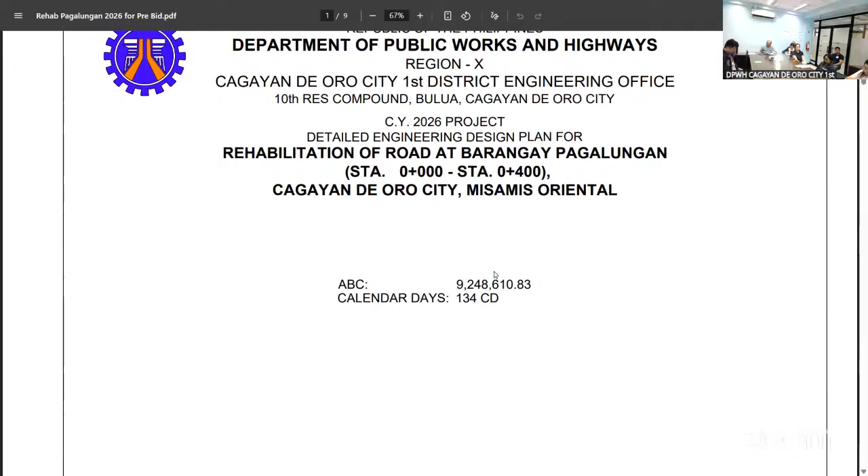Good afternoon. For rehabilitation of road at Barangay Pagalungan, Cagayan de Oro City, with an ABC as mentioned and 134 calendar days. Here is the map or the site development plan for the rehabilitation of road at Barangay Pagalungan, along with site pictures for the beginning and end. The scope of this project is mainly the rehabilitation of the existing road.

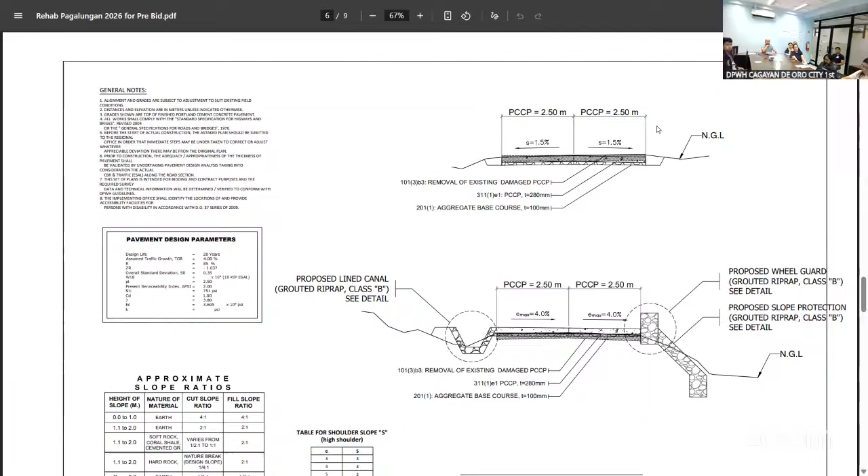Before showing the MER and summary of quantities, I'll show the typical roadway sections for the project. The rehabilitation of the existing road is to replace it at 2.5 meters per lane, with a PCCP thickness of 280 mm and an aggregate base course of 100 mm as shown. There is also a proposed lined canal for the project and slope protection as shown here.

And here's also the typical roadway section with a cross drain and catch basin, waterway, head wall, and there are the slope protection, grouted riprap details, the wheel guard details, and the lined canal details. For the head wall and the cross drainage system details, and a typical reblocking detail for rehabilitation of road.

So back to summary of quantities or the scope of works. We have permits and clearances, B.3, 1 lump sum for excavation permits, B.5, project billboards and signboard 4 each, B.7(2), occupational safety and health program, 1 lump sum, B.8(2), traffic management, 1 lump sum, B.9, mobilization plus demobilization, 1 lump sum.

For earthworks, we have 101(3)b3, removal of actual structures plus obstruction of 0.23 meters thick, PCCP unreinforced with a quantity of 2,000 square meters. 102(2), surplus common excavation with a quantity of 780.38 cubic meters. 103(1)a, for structure excavation common soil with a quantity of 563.43 cubic meters. And 104(1)a, for embankment from roadway plus structure excavation common soil with a quantity of 55.56 cubic meters.

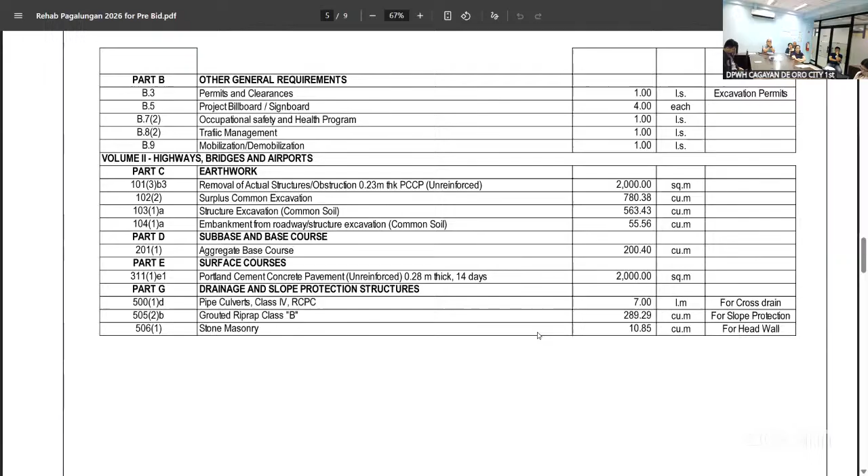And back to our MER, we have two-way radio, 3 units, subject for bid bulletin. So barricade flasher light, 10 units, trailer for equipment, 1 unit, trailer for minor tools, 1 unit. Backhoe with pavement breaker, 1 unit, payloader, 1 unit, dump truck, 2 units, concrete saw, 1 unit, bulldozer, 1 unit,

backhoe, 1 unit, motorized road grader, 1 unit, vibratory roller, 1 unit, water truck / pump, 1 unit, concrete vibrator, 2 units, concrete screeder, 1 unit, concrete saw, 1 unit, bar cutter, 1 unit, mechanized joint sealer, 1 unit, and material testing apparatus, 1 set. That's all for rehabilitation of road at Barangay Pagalungan. Any questions?

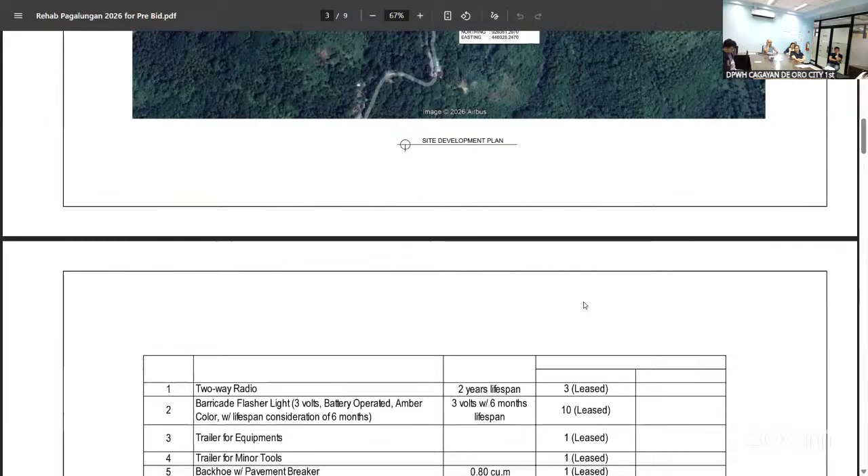So do we have any questions? How about from our online? There's nothing. Understood? So there's a bid bulletin for the minimum equipment requirements. So there's no questions regarding the details of this project.

So now let's proceed with the second project. Asset preservation, rehabilitation, reconstruction, upgrading of damaged roads, secondary roads, Cagayan de Oro City, coastal bypass road, S01248MN, Chainage 654 to Chainage 1123, Chainage 4,000 to Chainage 4150, Cagayan de Oro City. The details of this project will be discussed by Engineer Albert Marcel. So you can now proceed, Engineer Albert.

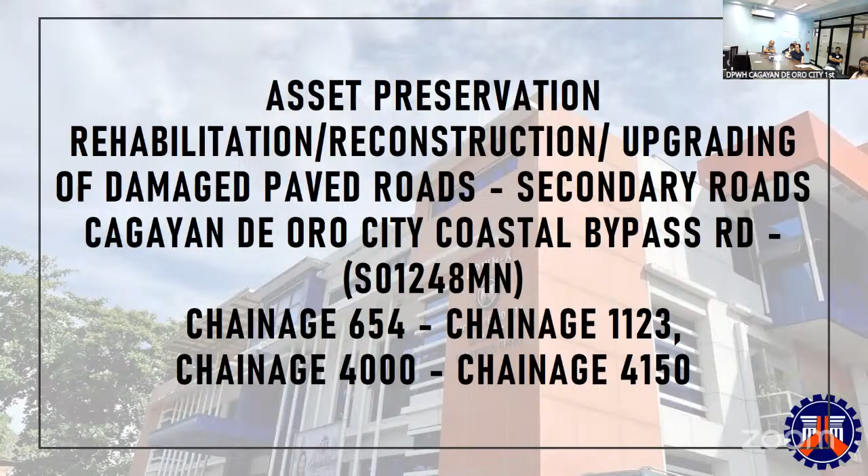Hello. Good afternoon, everyone. I will present 26KH0068, the asset preservation, rehabilitation, reconstruction, upgrading of damaged paved roads, secondary roads, Cagayan de Oro City, coastal bypass road, with a chainage of 654 to chainage 1,123, and chainage 4,000 to chainage 4,150. With the ABC of 18,499,235.25 pesos and a total project duration of 233 calendar days.

With a net length of remove and replace of the existing PCCP, replacing the existing 0.23 meter thick PCCP to 0.28 meter thick, 3 days. We did in chainage 654 to chainage 1040 with 3 lanes with a net length of 386 meters. Chainage 1040 to chainage 1170, 2 lanes, the length of 130 meters.

Chainage 4000 to chainage 4150, 2 lanes with the length of 150 meters. And also a sidewalk with the width of 1.25 meters with a net length of 373 meters. The major categories of work is RRP roads or Rehabilitation of Roads PCCP.

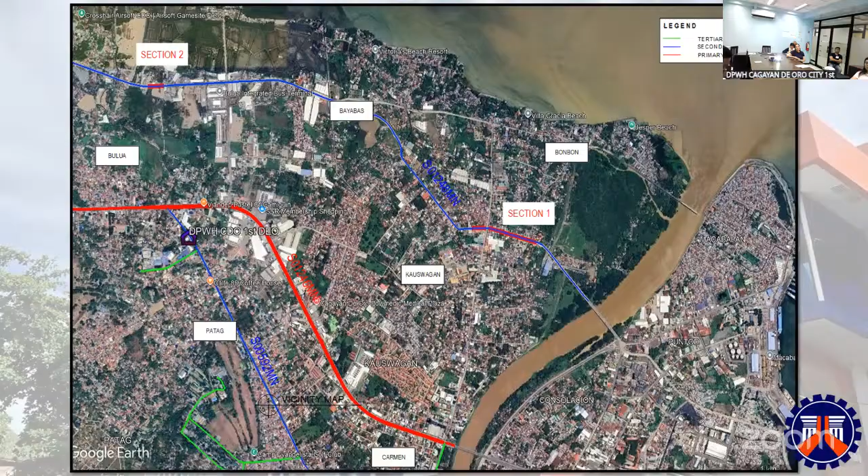For the location of our project, along the Coastal Bypass Road, it will begin before the Puntod Kauswagan Bridge. So the section 1, as indicated in the slide, along the Coastal Bypass Road. So here the section will start at chainage 654, indicated here.

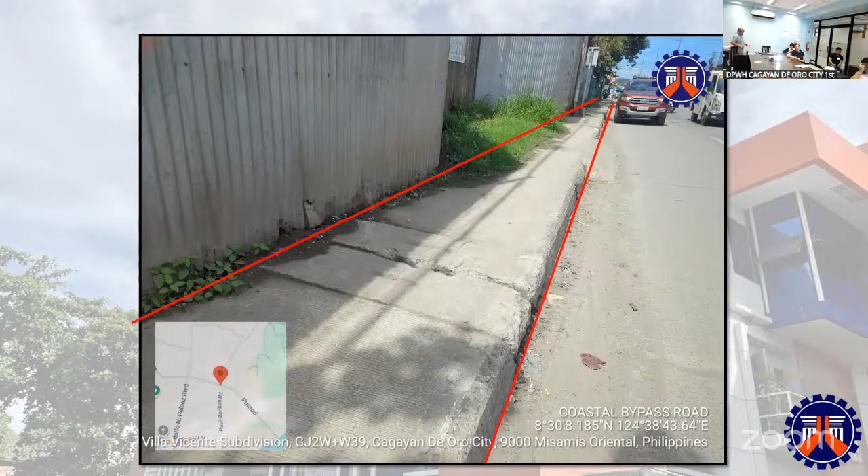These are pictures for the section 1. We will remove and replace the existing PCCP and also the sidewalk. Also clean and rehabilitate the existing pipe under the sidewalk.

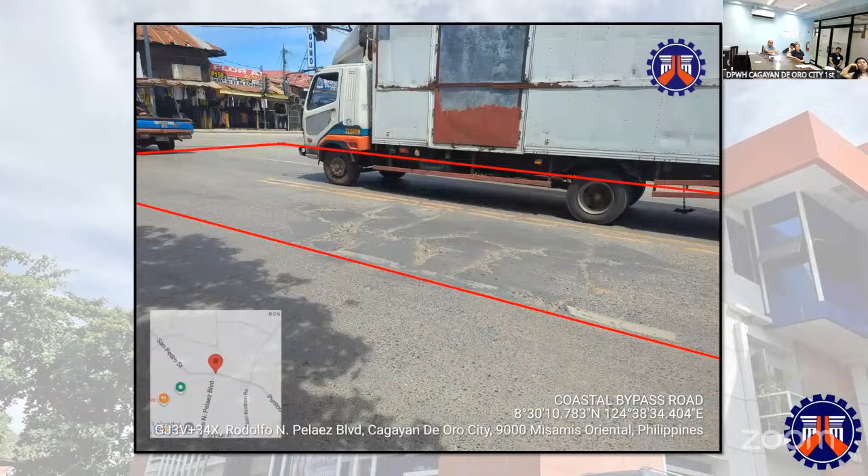So we use the 3 days PCCP curing period because of the traffic in this area, a very busy road. Also, the end of our section 1 will be near the Kauswagan Jollibee area. So this is the end of our section 1, chainage 1170.

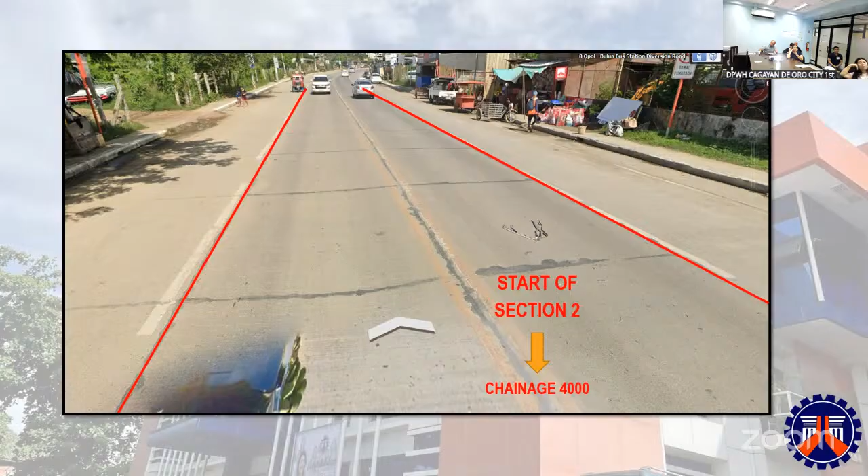For section 2, this is from the Cagayan de Oro Fish Port near the Bulua terminal. So we will start the section 2 at chainage 4000 and end in chainage 4150.

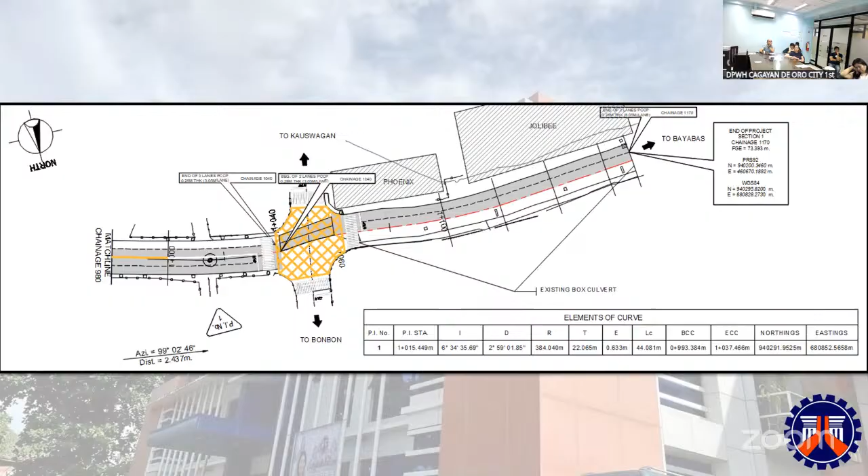For the plan of our project, it is indicated here. The grayed out area is the existing damaged paved road to be removed and replaced. And also the red area is the existing sidewalk to be removed and replaced also. There will be a yellow box on the intersection with this kind of crisscross pattern. And also for the section 2 with 150 meter length, the inner lanes are to be removed and replaced.

Typical roadway section 1, reblocking in 2 lanes in front of the Jollibee Kauswagan. There's an existing box culvert, so we'll only remove and replace the 2 lanes on the left side, which is very worn down. So for the typical section 2, reblocking the inner lanes.

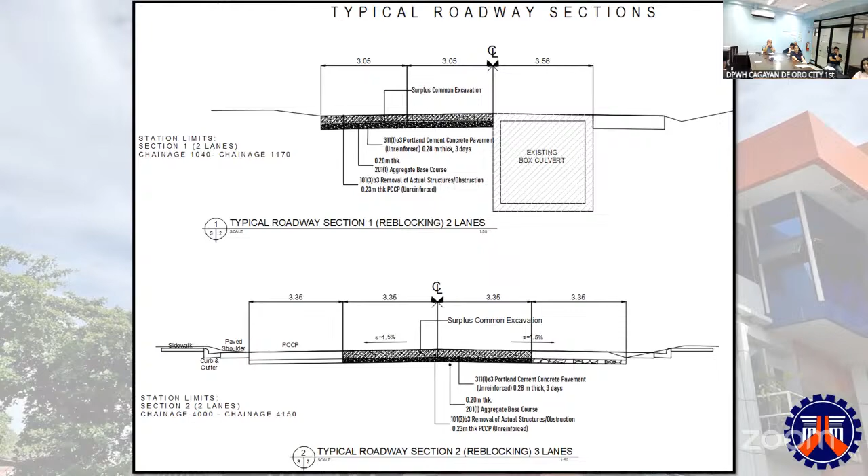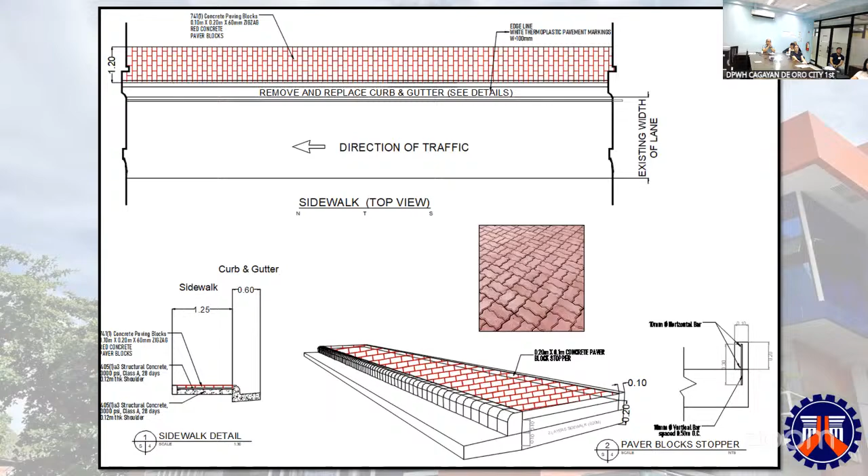We have the typical reblocking dowel pavement details for our dowels, and also the curb and gutter details, the complete curb and gutter detail, the paver block stopper detail, sidewalk details, and the drop curb details; especially on intersections and existing commercial areas, we will provide the drop curb. The schedule of markings, the general detail, and also the pavement marking details in the intersection. We have a 0.20 meter thick yellow thermoplastic crisscross line in the intersection, and also the pedestrian.

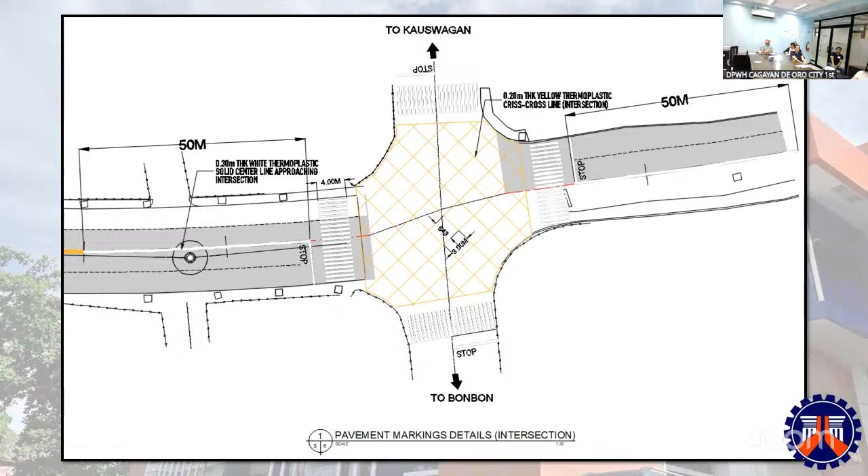For the summary of quantities, we have the project billboard signboard, 5 each, the occupational safety and health program 1 lump sum, traffic management 1 lump sum, mobilization and demobilization 1 lump sum. For our earthworks, we have the removal of structure/obstruction 0.23 thick PCCP unreinforced of 5,703 square meters. The removal of actual structures obstruction 0.10 m thick sidewalk with 933 square meters. Removal of actual structure obstruction curb and gutter with the quantity of 373 linear meters.

For our base course, aggregate base course of 1,098 cubic meters. For surface course, we have the Portland cement concrete pavement unreinforced 0.28 thick 3 days, quantity of 5,490 square meters. The reinforcing steel deformed grade 40, quantity of 916.27 kilograms. This is for the reinforcement of the block stopper for the sidewalk. Structural concrete 20.68 megapascal class A 28 days with a quantity of 7.48 cubic meters, also for our block stopper. Structural concrete painting works of 104.44 square meters for the curb and gutter paintings.

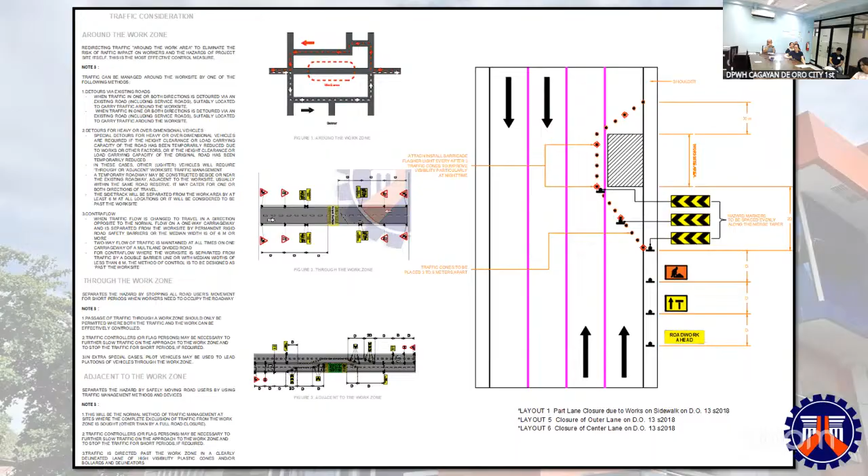For the provisional lump sums, we have the traffic management. We have 3 layouts indicated in our project, especially since it's a very busy section of our road, the coastal bypass road. Indicated here is the typical layout. This is the summary of the traffic management, the stages needed to follow. So we have a very large amount allotted for the traffic management.

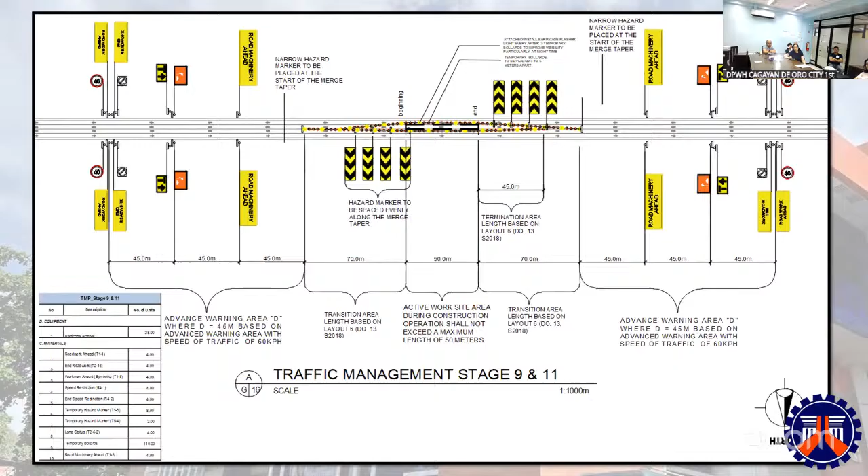For the section 1 and section 2, we have the traffic management stage 1 to 8 and 30 to 31. This is the placement of our markers or hazards for the area, especially on the center line, every 50 meters. Our second in segmenting the projects, we have the traffic management at stage 13 to 22. It is on the outer areas. Stage 9 and 11. Also traffic management stage 10 to 12, especially working on the sidewalks.

And thank you, and that's all for our 26KH0068. Thank you, Engineer Alvin Margin.

So do we have any questions or clarifications regarding the details of the project? Do we have? Yes, ma'am. How about from our online viewer? So there's none. Since there's no questions in the details of this project, so now let's proceed for our third

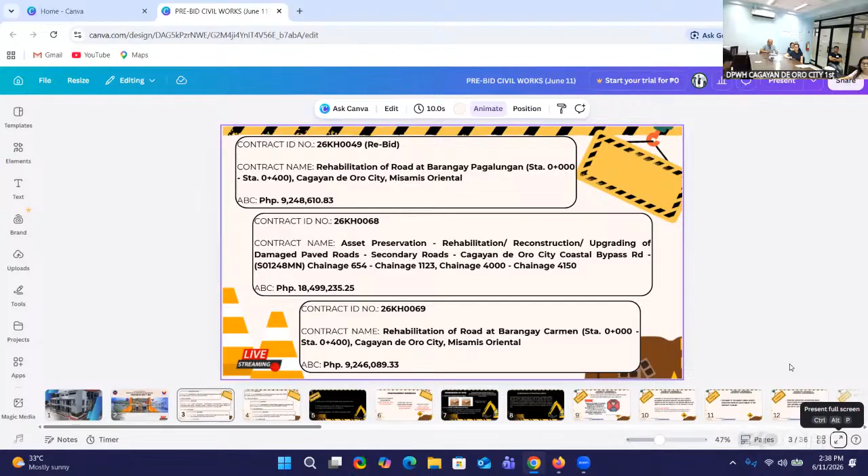project. The 26KH0069, Rehabilitation of Road at Barangay Carmen, Station 0+000 to Station 0+400, Cagayan de Oro City, Misamis Oriental, with an approved budget for the contract of 9,246,089 pesos and 33 centavos. So the details of this project will be discussed by Engineer Kenneth Carl. You can now proceed, Engineer Kenneth Carl.

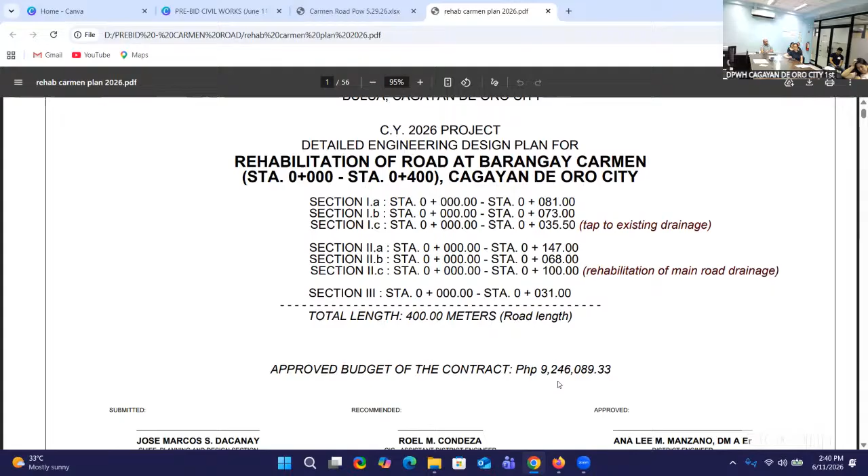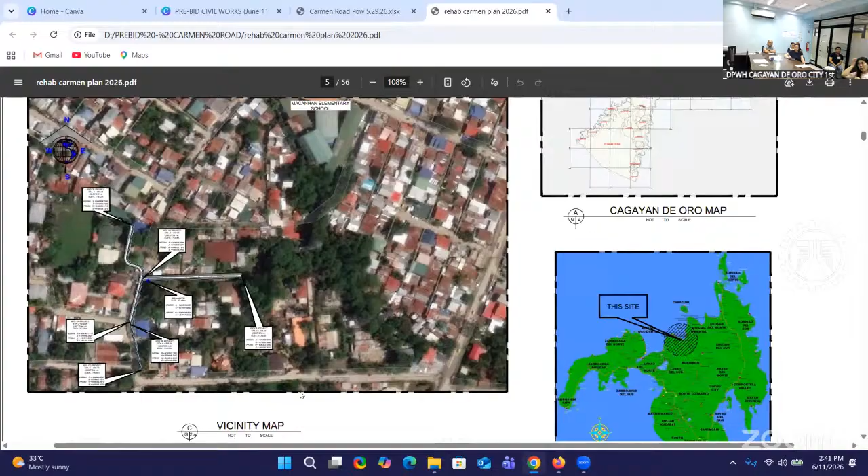So the approved budget for the contract is 9,246,089.33 pesos. So this is the section 1. So this is the location of section 1. So it was right behind the Macanhan Elementary School. So this is the main road here.

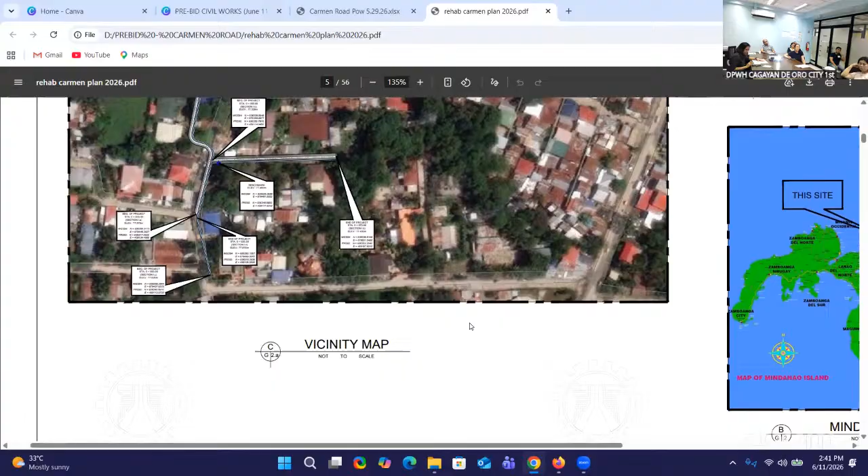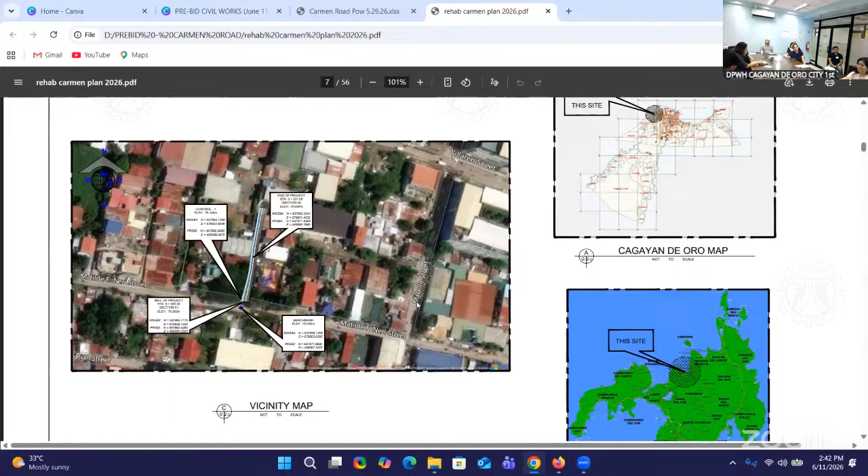So this is the section 2. So it's located at Gumamela Street. So this is the Gumamela Street passing to the main road. So section 3. So this is located near the Barangay Hall, Carmen. So this is the Barangay Hall of Carmen. So the intersection. This is the site development of 3 sections.

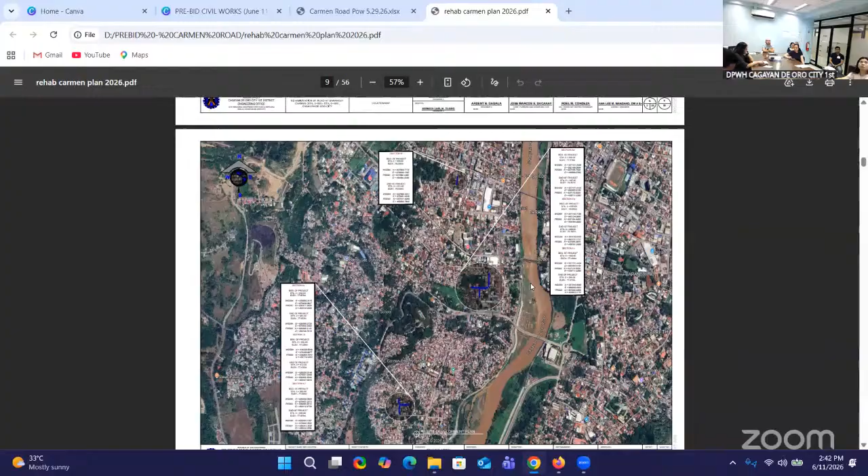So this is the scope of traffic management involved. So we have workmen, 2 each, prepare to stop, 2 each, temporary hazard marker, 1 each, traffic cone at 5 meters apart, 16 each. The equipment is stake truck, 1 each, barricade flasher light, 4 each.

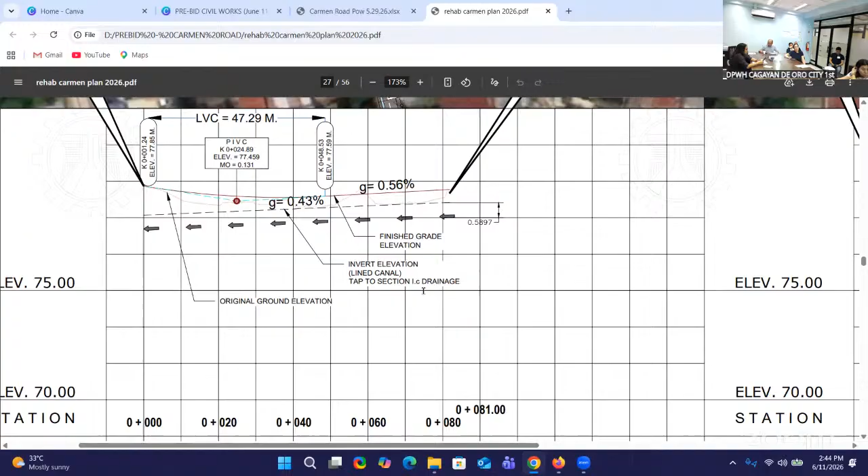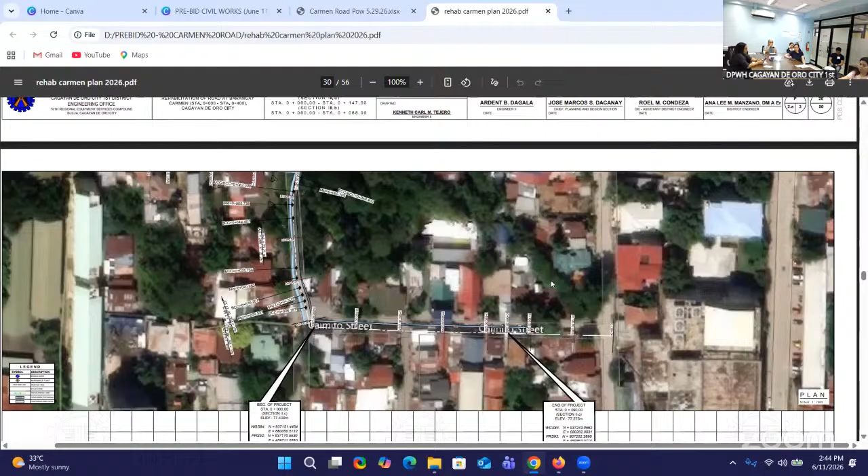So this is the plan and profile. On the plan and profile, we see the labels. It's indicated in the profile, the finished grade elevation, the invert elevation, and the original ground elevation. So this is all the same for all sections. Section 2. This is the section 3.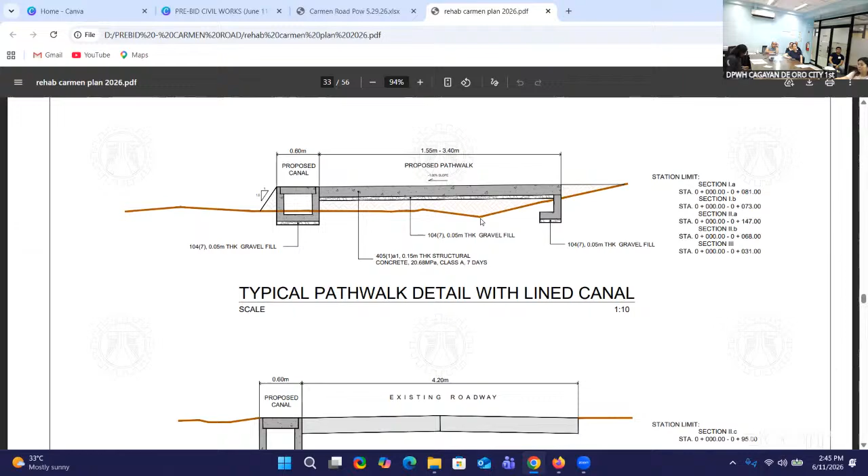So this is the typical detail for the rehabilitation of road. It was a pathwalk detail. It is composed of gravel fill, 0.05 meter thick, structural concrete, 20.68, class A, 7 days. So this is the typical detail with RSB. So it has a station limit, it's indicated here.

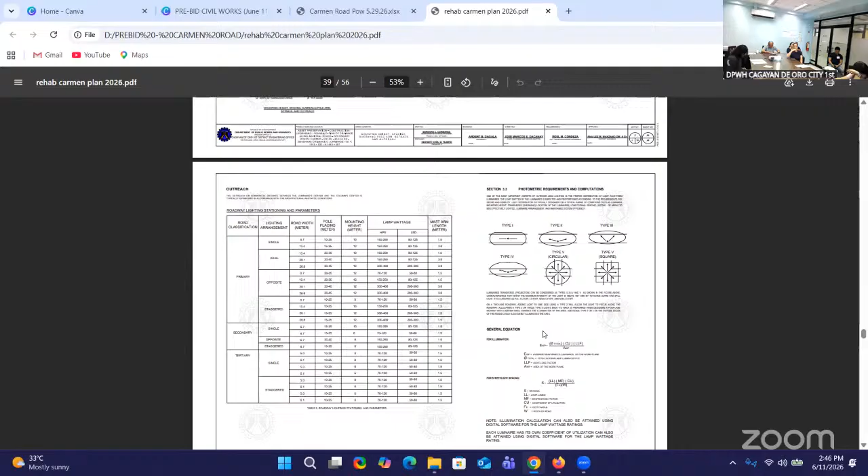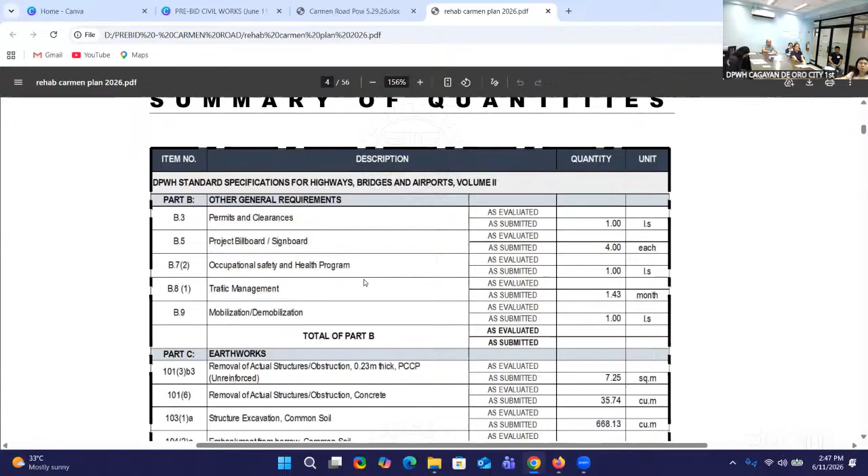So these are the summary of quantities. So under the DPWH standard specification for highways, bridges, and airports, volume 2, we have B.3 permits and clearances, 1 lump sum. B.5 project billboard or signboard, 4 each. B.7 2 occupational safety and health program, 1 lump sum. B.8 1 traffic management, 1.43 months. B.9 mobilization, demobilization, 1 lump sum.

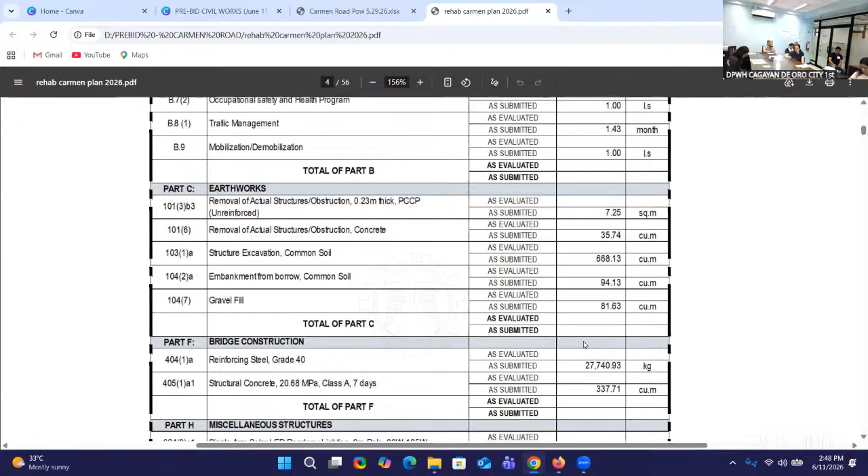1013B3 removal of actual structures, obstruction, 0.23 meter thick PCCP unreinforced, 7.25 square meter. 1016 removal of actual structure, obstruction, concrete, 35.74 cubic meter. 103 1A structure excavation, common soil, 668.13 cubic meter. 104 2A embankment from borrow, common soil, 94.13 cubic meter. 1047 gravel fill, 81.63 cubic meter. 404 1A reinforcing steel, grade 40, 27,740.93 kilograms. 405 1A1 structural concrete, 20.68 megapascal, class A, 7 days, 337.71 cubic meter.

6249 C1 single arm solar LED roadway lighting, 9 meter pole, 80 watts to 125 watts, but we use the maximum 125 watts here, 18 each. So under the DPWH standard, volume 3, buildings, ports and harbors, flood control and drainage structures and water supply systems, we have 903 2 formworks and falseworks, 1,893.28 square meter.

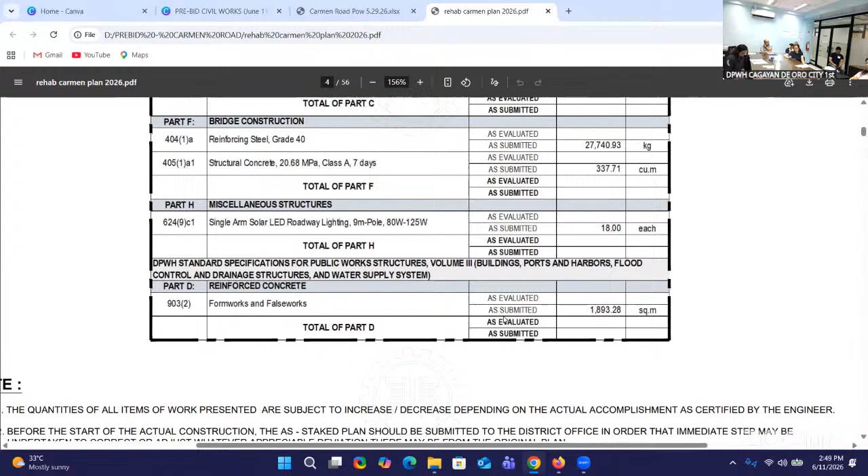So that's all for this project. So any questions and clarification?

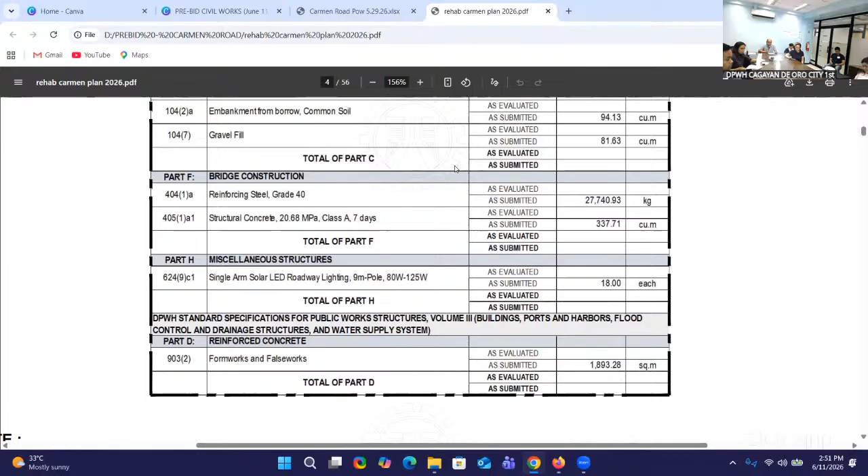So now let's proceed for our fourth project, 26KH0070, rehabilitation of road at Barangay Lumbia, station 0+000 to station 1+500, Cagayan de Oro City, Misamis Oriental.

Approved budget for the contract for this project is 27,747,808 pesos and 32 centavos. The details of this project will be discussed by Engineer Carmen. You can now proceed with your comment.

Good afternoon again, for rehabilitation of road at Barangay Lumbia with the station 0 to station 1+500. There are calendar days of 308 and scope of works of rehabilitation of existing road.

So for section 1 of the project, as shown here, is the location marked with the red line for the alignment. It is located near Baluarte Elementary School for the beginning of the project. This is a site picture for the beginning, shown for the damaged paved road, and for the end, shown here at the bottom left.

So the total length of this red line is 1,000 meters. But not all of the length will be rehabbed, so that will be shown in the back.

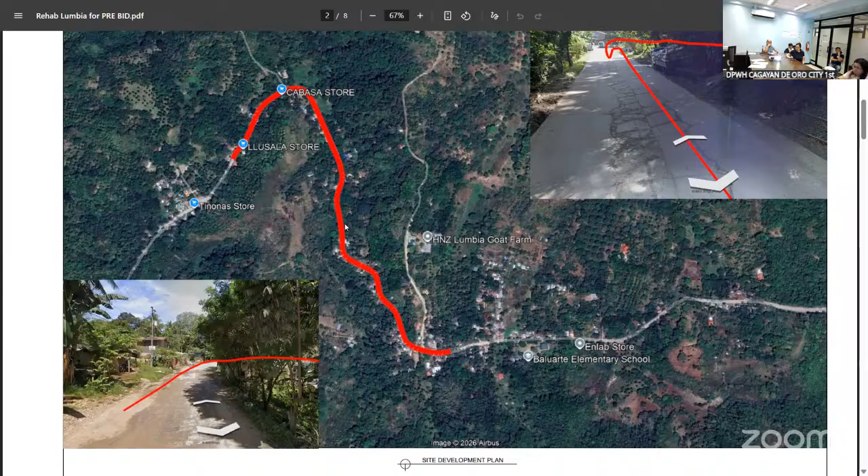For these sections, you only have to use 0.23 meter thick PCCP. Unlike section 1, which is along the main road, with 0.28 meter thick PCCP.

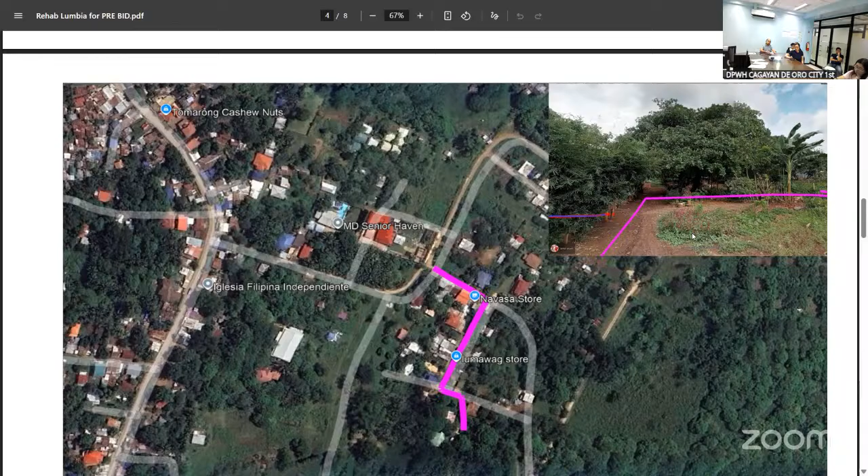And for the summary of quantities, we have permits and clearances, B.3, 1 lump sum. B.5, project billboards or signboard, four each. B.72, occupational safety and health program, 1 lump sum. B.82, traffic management, 1 lump sum. B.9, mobilization plus demobilization, 1 lump sum.

And for our 1013B3, for removal of actual structures/obstruction of 0.23 meters thick PCCP unreinforced, we have a quantity of 5,740.45 square meters. For 1022, surplus common excavation, we have a quantity of 3,681.80 cubic meters.

For 1041A, for embankment from roadway/structure excavation, common soil, we have a quantity of 335.50 cubic meters. And for aggregate base course, we have 2011 with a quantity of 2,065.98 cubic meters. For surface course of the 311B1, for the cement concrete pavement unreinforced with 0.20 meters thick, 14 days, quantity of 2,935 square meters.

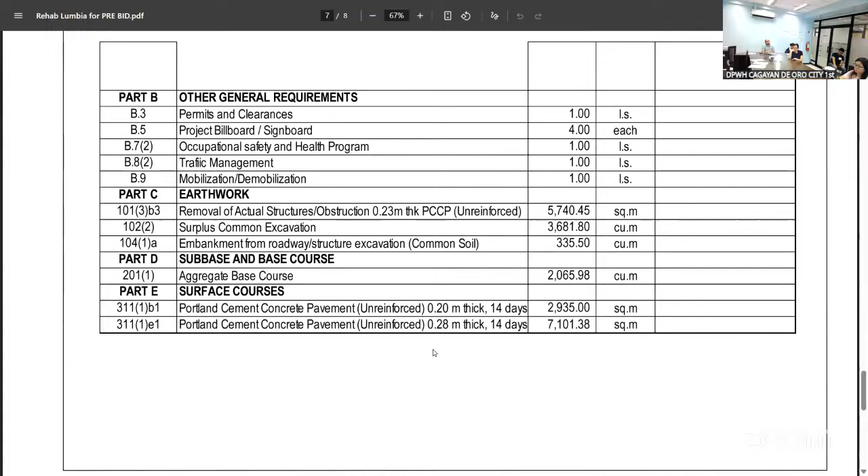And 311E1, for the cement concrete pavement unreinforced 0.28 meters thick, 14 days, 7,101.38 square meters.

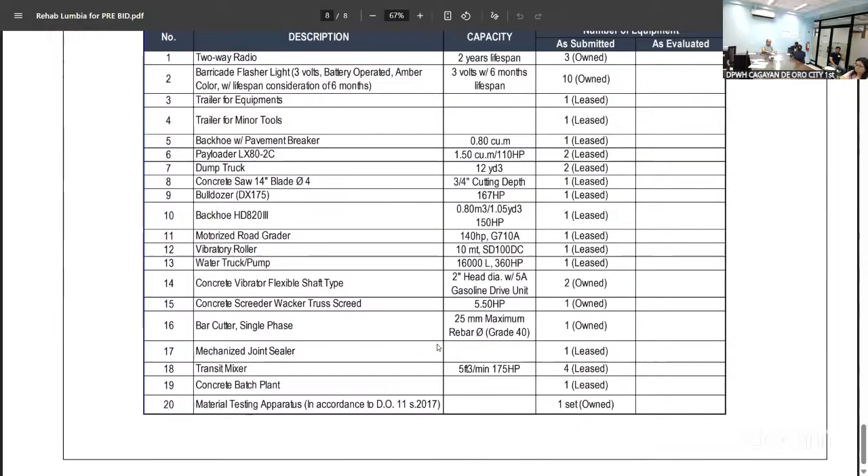For two-way radio, we have 3 owned, barricade flasher light 10 owned, trailer for equipment 1 lease, trailer for minor tools 1 lease, backhoe with pavement breaker 1 lease, payloader 1 lease, dump truck 2 lease, concrete saw 1 lease, bulldozer 1 lease, backhoe 1 lease, motorized road grader 1 lease, vibratory roller 1 lease, water truck slash pump 1 lease, concrete vibrator 2 owned, concrete screeder 1 owned, bar cutter 1 owned, mechanized joint sealer 1 lease, transit mixer 4 lease, concrete batch plant 1 lease, and material testing apparatus 1 set owned.

This project is still subject for bid bulletin. Thank you, for rehabilitation of road in Barangay Lumbia.

Thank you, Engineer Carmax, Mano. So, do we have any questions or clarification for this project? There is none. How about from our online viewers? So there's none, since there's no questions regarding the details of this project.

So now let's proceed to our fifth project, 26KH0071. Construction of multi-purpose building in Barangay San Simon, Cagayan de Oro City, Misamis Oriental. The coordinates are 124.5631 degrees and 8.4370 degrees, with a budget of 9,899,358 pesos and 31 centavos.

So the details of the project will be discussed by Architect Malo Fornanes. You can now proceed, Architect Malo. Good afternoon to all our visitors and our viewers.

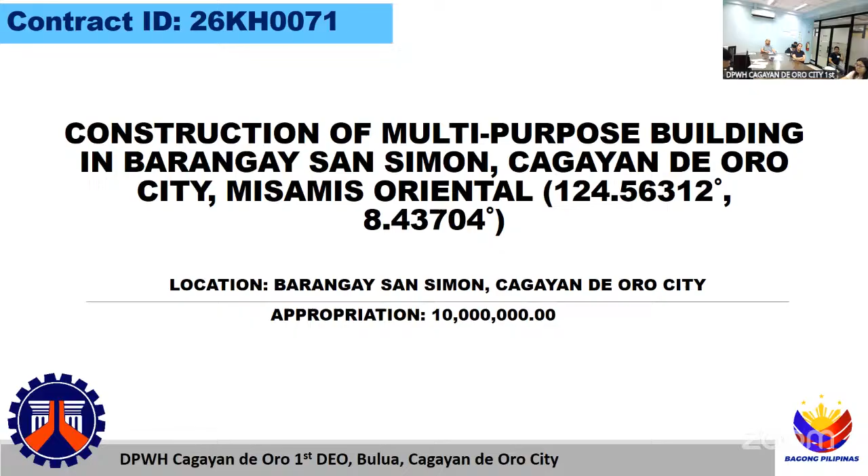For our project 26KH0071, entitled Construction of Multipurpose Building in Barangay San Simon, Cagayan de Oro City, Misamis Oriental. The location is Barangay San Simon, Cagayan de Oro City, with an appropriation of 10 million, and an ABC of 9,899,358.31 pesos.

With calendar days of 180. For major categories: BIC, WO, PLC, buildings construction without piles, low-rise, concrete frame. For similar major category: BIC, WO, PHC, buildings construction without piles, high-rise, concrete frame. The scope of work for this project is the construction of a 3-story multi-purpose building with demolition of existing structure.

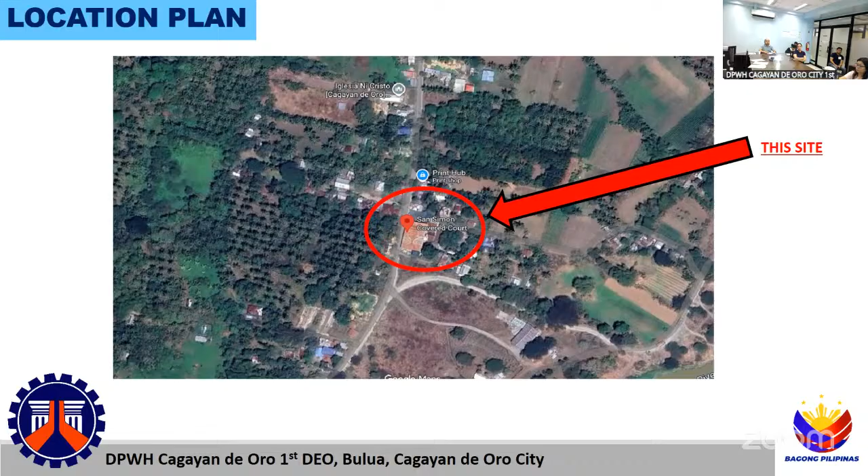So this is our location plan, located at the Barangay properties adjacent to the San Simon Covered Court. This is the area of our proposed project. The photo on the right side is the location of the project.

The existing structures are to be removed. These are the site photos taken. This is our site area. And this is our proposed perspective of the project.

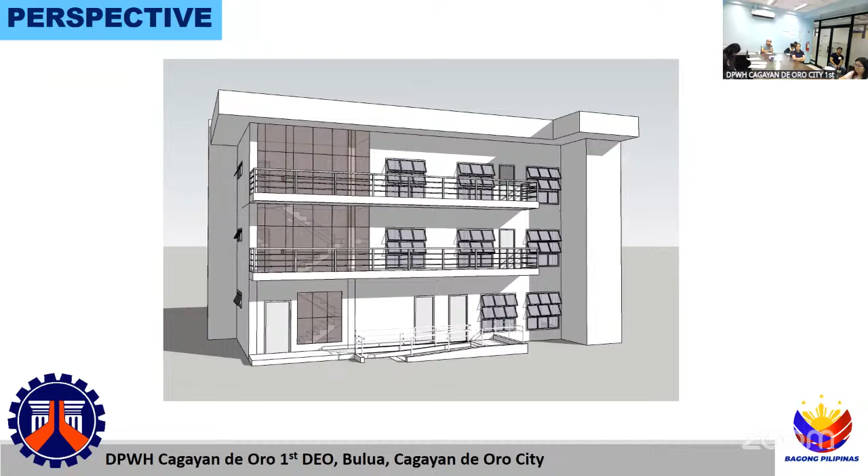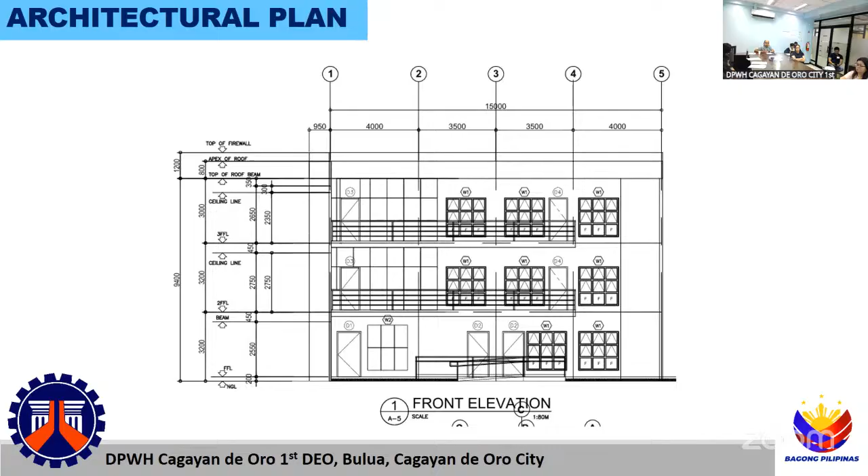So these are our front elevation, our left elevation, and the right and rear elevation. This is the firewall side, since it is already located at the very edge of the property. So this is the section, the cross section, and our roof plan.

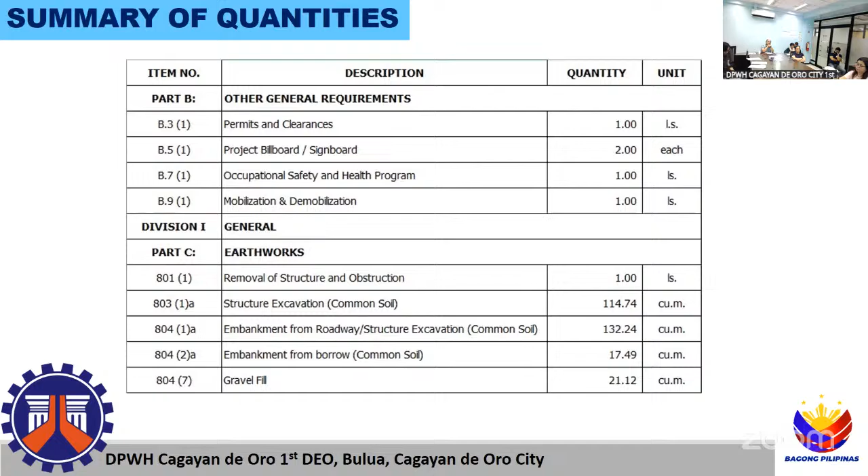For our earthworks, we have removal of structure and obstruction, 1 lump sum; structure excavation, common soil, and embankment from roadways, structure excavation, 132.24 cubic meter; embankment from borrow, common soil, 17.49 cubic meter; and gravel fill, 21.12 cubic meter.

For our reinforced concrete, we have structural concrete 3,000 PSI Class A, 28 days, 63.69 cubic meter, for the footing, column, grade beam, roof beam, and wall footing. And for structural concrete Class A, 28 days, 47.70 cubic meter, for the second and third floor beams and second and third floor slab.

And for structural concrete Class B, 28 days, 16.09 cubic meter, for the slab on grade. For the lean concrete item, 4.20 cubic meter for the wall footing base. And reinforcing steel, deformed grade 40, 29,900.30 kilograms. And formworks and falseworks, 832.01 square meters.

For our finishing and other civil works, we have soil poisoning, 14 liters; storm drainage and downspout, 1 lump sum; pipes with fittings connection, 1 lump sum; and plumbing fixtures, 1 lump sum.

Stainless steel grab bar, 2.55 linear meter for the PWD toilet. Facial mirror for the toilets, 1.08 square meters. Cold water line, 1 lump sum. Ceiling metal frame fiber cement board, 4.5 mm thick, 101.24 square meters.

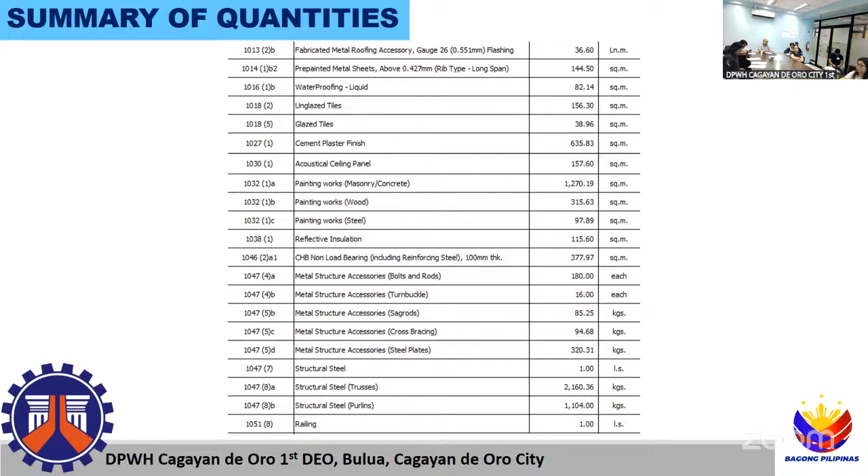Structural steel, 1 lump sum. Structural steel trusses, 2,160.36 kilograms. Structural steel purlins, 1,104 kilograms. And then railings, for all the railings including ramps, stairs, and the balcony, 1 lump sum.

For the electrical works: conduit boxes and fittings, conduit works, conduit roughing-ins, 1 lump sum. Wires and wiring devices, 1 lump sum. Panel board with main and branch breaker, 1 lump sum. Lighting fixtures and lamps, 1 lump sum. CCTV system, 1 lump sum.

For the mechanical, we have ventilating equipment, 1 lump sum. Fire hose valve Siamese, 1 set. Fire hose cabinet assembly, 3 sets. Fire extinguisher, 10 pounds with bracket, 12 sets. Fire alarm system.

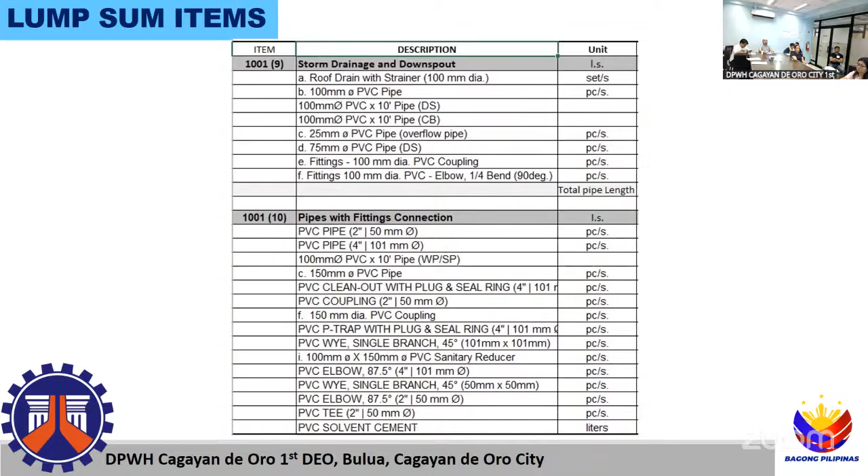So these are the lump sum items for our storm drainage downspout. This is for the roof drain, then PVC pipes and connections. And for pipes with fitting connections, this is for the plumbing pipes and connections. And for the item plumbing fixtures, we have the water closet, wall hung lavatory, stainless plates, drain, floor drain, sink drain, and faucet.

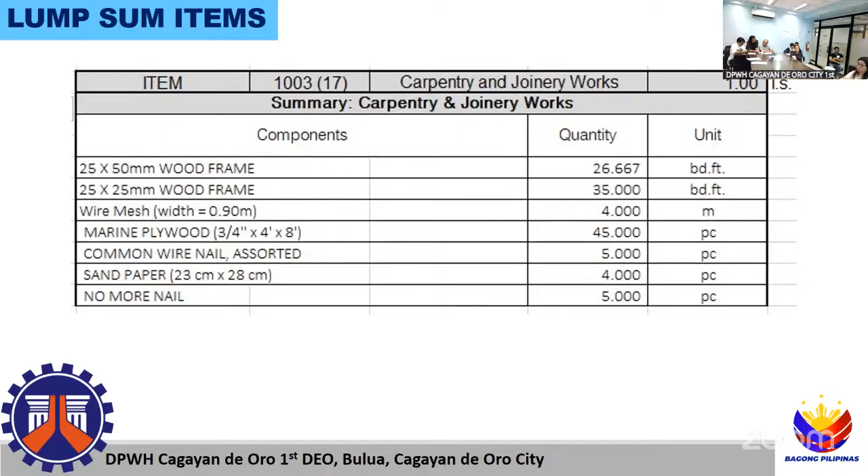And for the cold water line lump sum, we have the pipes for the water supply. We have these fittings also, water meter, and other fittings used. And for the carpentry and joinery works, we have the wood frame, the wire mesh, the marine plywood, and the wire nail, sandpaper, and no more nail. So this is for the carpentry and joinery works.

For our conduits, boxes, fittings, conduit works, conduit roughing-ins, these are the electrical items used in all the electrical preparations. And for our wires and wiring devices, these are all the wires to be used in the project. For specifications, you can directly ask our electrical engineers.

So these are the materials. And for our panel board with main, branch, and breakers, these are the specifications. Panel board for 4 branches, main distribution panel board, flush mounted with 250 amperes, NEMA 1 flush type. So these are 4 branches.

So for our lighting fixtures and lamps used, we have the lighting fixture, 30 watts LED panel lights, recessed mounted type L, 1200 mm by 300 mm, 230 volts, 60 hertz. And then 9 watts downlight pin light with 9 watts LED bulb, 152 mm diameter or 6 inches diameter, recessed type.

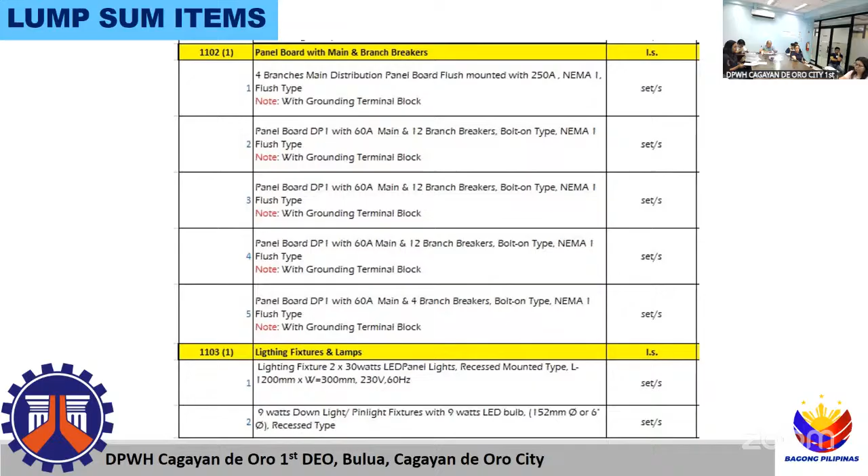So for our ventilating equipment, we have a 75 watt ceiling mounted exhaust fan, cassette type, 230 volts, 60 hertz, including pipe cost and installation cost. And for the fire hose valve Siamese item, we have fire hose valve Siamese 100 mm diameter by 63 mm by 63 mm diameter two-way cap for our fire hose cabinet assembly.

And then for our fire extinguisher, 10 pounds with bracket, this is 10 pounds CO2 slash HCFC type, environmental friendly ABC type with bracket, wall mounted. And for our lump sum item for the fire alarm system, we have smoke detector with base, fire alarm bell, fire alarm control panel for zones, push and pull manual station, fire alarm bell annunciator, siren, and strobe light.

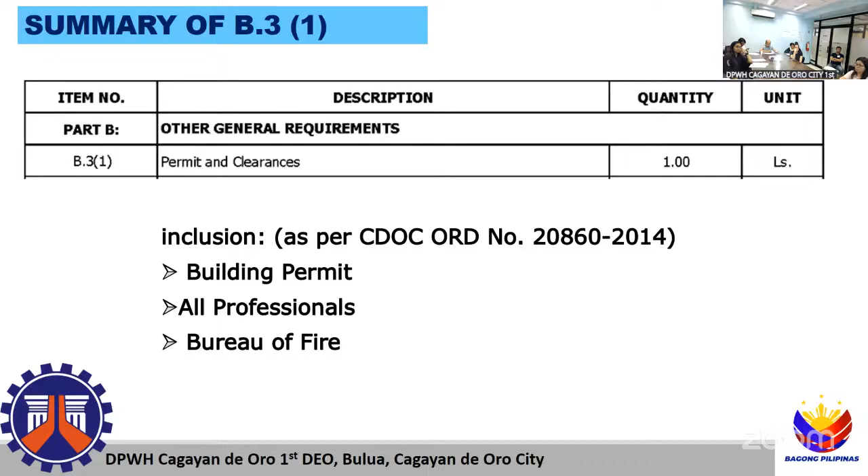And then for our permits and clearances, this includes all the building permit and securing for this project, and then all professionals involved in the signatories of the permit, and then the Bureau of Fire. So for our safety signages, our safety and health signages for this project, these are the standards, located in the respective areas of the project. These are very important.

And then for our minimum equipment requirement: backhoe, 0.83 cubic meter by 1.05 YD, D3, 150 horsepower, 1 unit lease; concrete vibrator, 2 units owned; dump truck all models, 1 unit lease; 1 bagger mixer, 1 unit owned; plate compactor, 1 unit owned; grinding machine with accessories, 1 unit owned; bar cutter, 1 unit owned; bar bender, 1 unit owned; welding machine, electric driven or DC output, 500 amperes, 1 unit owned; boom truck, 1 unit leased; material testing apparatus, 1 set owned; minor tools, 1 set owned; jackhammer, 1 unit owned; concrete pump, diesel driven, 1 unit leased.

So thank you, that's for the project. Any questions or clarifications from our viewers or visitors?

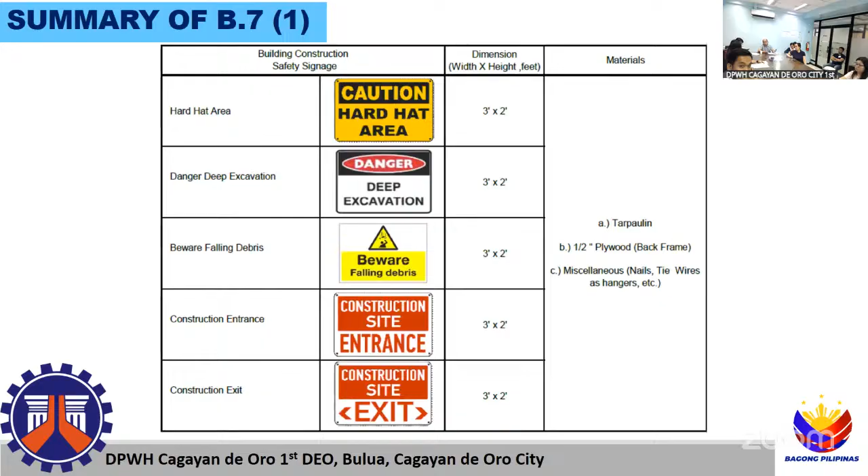The schedule of filing of bids for all the projects discussed today is June 23. The schedule of opening of bids, and most probably the NOA (Notice of Award) for this project will be the second week of July or third week of July, if the bids are successful. Thank you.

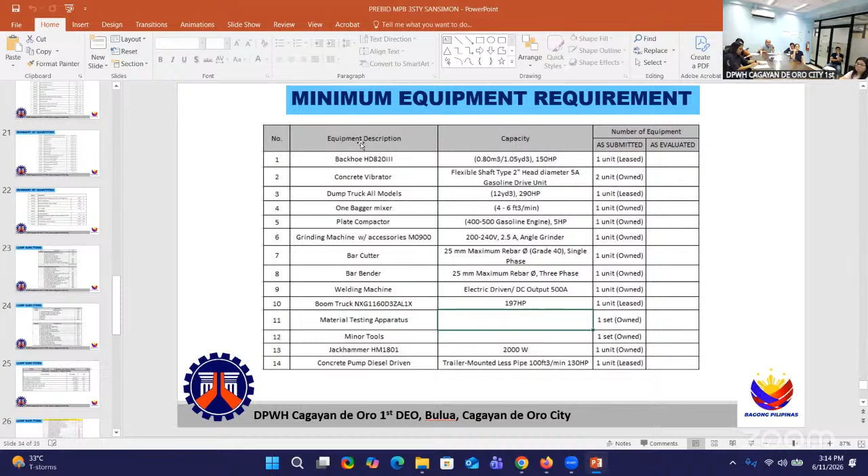We will make a clarification also for our interested bidders regarding the item structural concrete. We have 3 types of structural concrete items: 3,000 PSI, and then for block class B, it is 4,000 PSI.

Please also clarify, this is also subject for bid quantity, as well as the excavation and embankment items that we discussed. Okay, Christian will clarify, it should be quantity, not quality.

Okay, so I would like to remind our interested bidders for this project to please look out for our bid bulletin for this project.

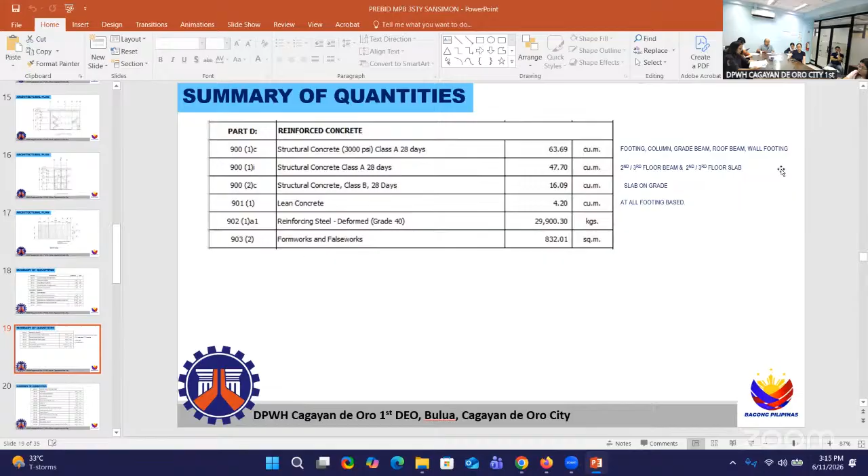So are there still questions or clarifications? There's none. How about for our online viewers? There's none, sir. So there are no more questions regarding this project.

So we can now proceed to our last project.

Project 26K0072: Construction of public solar water system at Barangay Pigsag-an, Cagayan de Oro City, Misamis Oriental, with an approved budget for the contract of 9,897,424 pesos and 26 centavos. The details of this project will be discussed by Engineer John Lloyd Rojas. You can now proceed, Engineer John Lloyd.

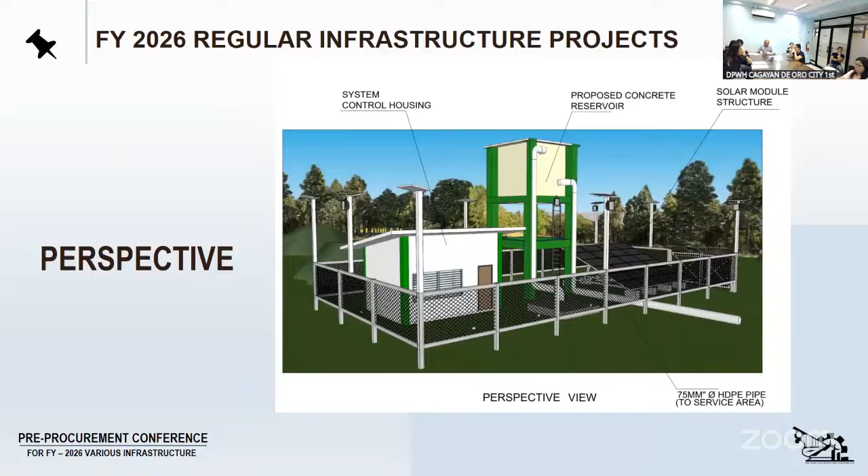9,897,424 pesos and 26 cents. Based on the General Appropriation Act, the fund source is for construction of a solar water system with a deep well water source. This is the location of the project, located at Pigsag-an Elementary School, Cagayan de Oro City, in the premises of the elementary school, exactly at the back of the school. This is the proposed perspective of the project.

And the typical deep well detail and perforated pipe detail, pump electrode installation detail, and the deep well data. For this project, we should conduct a geo-resistivity test with a 100 meters depth to locate water saturated aquifers, estimate drilling depth, and assess water quality. Since it has no specific pay item, I inserted it in the water pumping system pay item.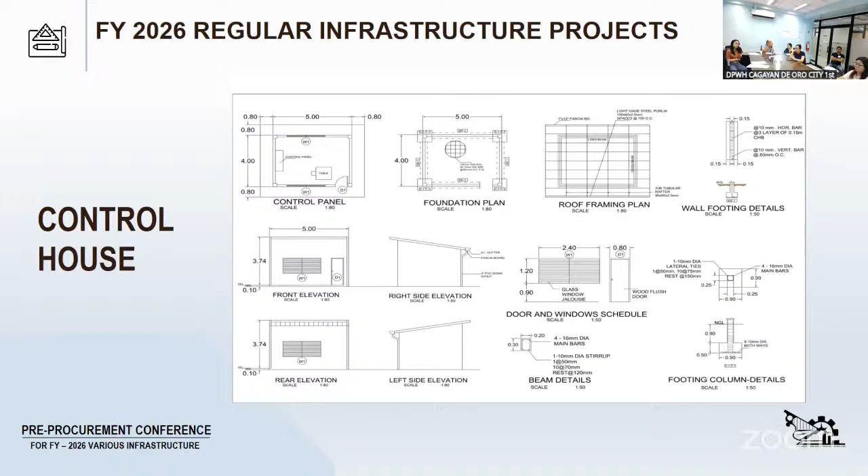And this is the proposed concrete reservoir, the proposed control house, and the proposed solar panel with 24 panels. So this is the perspective of the proposed tap stand.

The HDPE pipe length is 1,545 meters for the distribution pipe, which uses 75 mm diameter HDPE pipe. The number of tap stands is 13 tap stands. So this is the summary of quantities.

Part A, facilities for the engineer: provision of field office for engineer, rental basis, 5.03 months. For this item, the equipment consists of a 40-footer container van with AC unit, furnished and maintained, and provide 3 chairs and 3 tables or equivalent. When we say equivalent, we can rent a house equivalent to the amount of the equipment within the duration of the project.

So Part B, other general requirements: B.5, project billboard/signboard, each; B.7, occupational safety and health program, 1 lump sum; B.9, mobilization and demobilization, 1 lump sum.

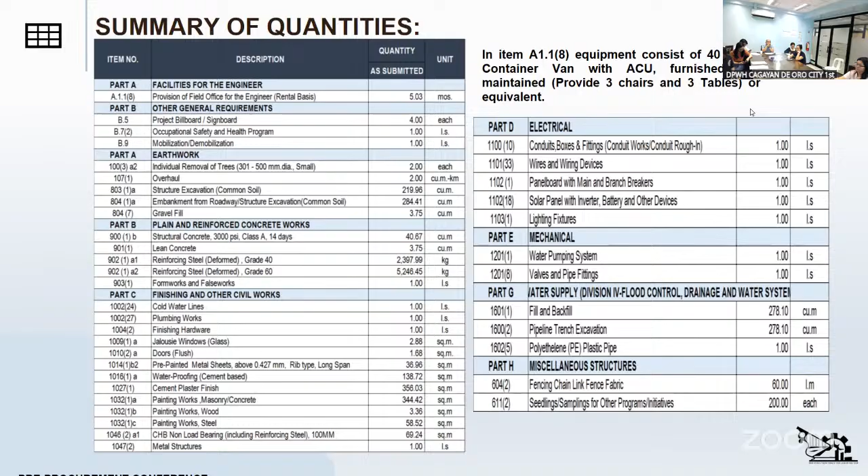So this is our minimum equipment requirement: 40-footer container van with electrical supply, furnished and maintained, 1 unit; plate compactor, 1 lease; dump truck, 2 lease; boom truck, 1 lease; water truck, 1 lease; bulldozer, 1 lease; payloader, 1 lease; backhoe, 1 lease.

Bar cutter, single phase, 25 mm maximum rebar, grade 41, own. Bar bender, 3 phase, 26 mm maximum rebar diameter, grade 41, own. 1 bagger mixer, own. Concrete vibrator, own. Cutting outfit, own. Motorized road grader, own. Drilling machinery, 1 lease. Cargo service truck, all models, 1 lease. Material testing apparatus, 1 set, own.

And this project is subjected to a bid bulletin. That's all, thank you.

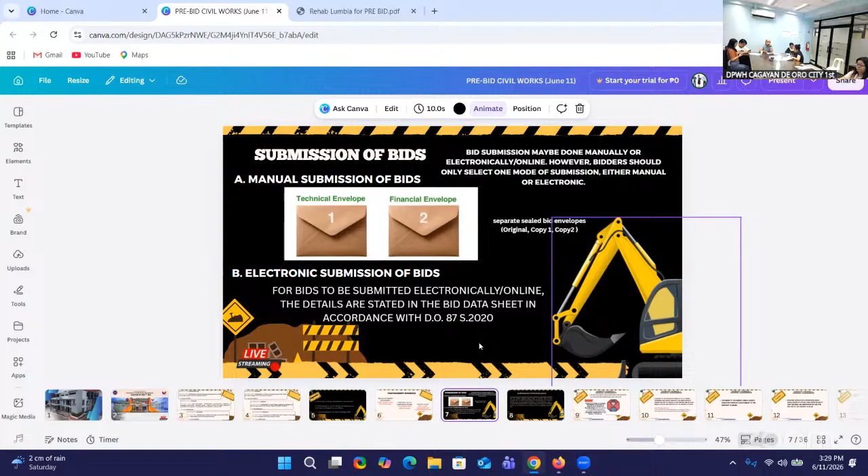For the electronic bid submission, the details are stated in the bid data sheet, in accordance with D.O. 87, series of 2020. Bidders may choose only one mode of submission.

During the submission of the bid proposals, it may be submitted through an authorized representative together with the original notarized special power of attorney, attached with their government ID. The SPA shall state the contract IDs or the specific project they intend to participate in.

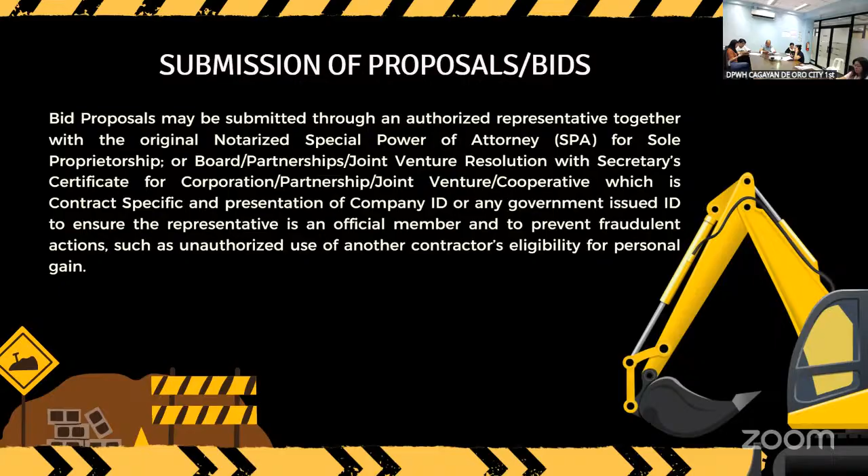For the eligibility, technical and financial requirements enclosed in the first envelope, we have the valid PhilGEPS registration certificate for platinum membership. All pages shall be enclosed, including Annex A.

We also have the statement of the prospective bidder of all its ongoing government and private contracts, including contracts awarded but not yet started, if any, whether similar or not similar in nature and complexity to the contract to be bid.

We would like to remind prospective bidders that non-disclosure, failure to disclose required information, or providing incomplete or false details may result in disqualification from the bidding process. Another requirement is the statement of the bidder's single largest completed contract similar to the contract to be bid.

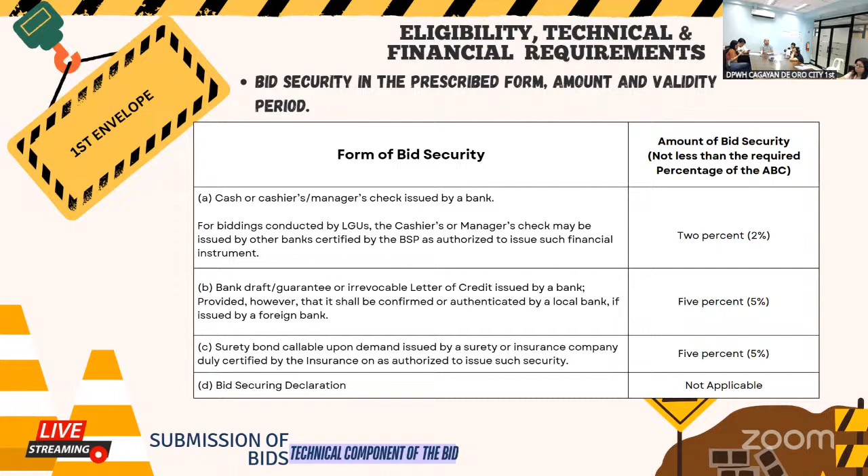So we have also here in the first envelope the Philippine Contractors Accreditation Board license, or the special PCAB license in case of joint ventures, and registration for the type and cost of the contract to be bid. So for the bid security, we have four forms, so you may choose which form you prefer. We have here the bid securing declaration, which does not require the amount of bid security. So we have a standard form for the BSD, or the bid securing declaration.

So for the project requirements, we have here the organizational chart for the contract to be bid. So this is the standard form. The list of contractors' key personnel to be assigned to the contract to be bid with their complete qualification and experience data. Then the list of contractors' major construction and laboratory equipment units, which are owned, leased, and/or under purchase agreements, supported by proof of ownership or certification of availability of equipment from the equipment lessor/vendor for the duration of the project.

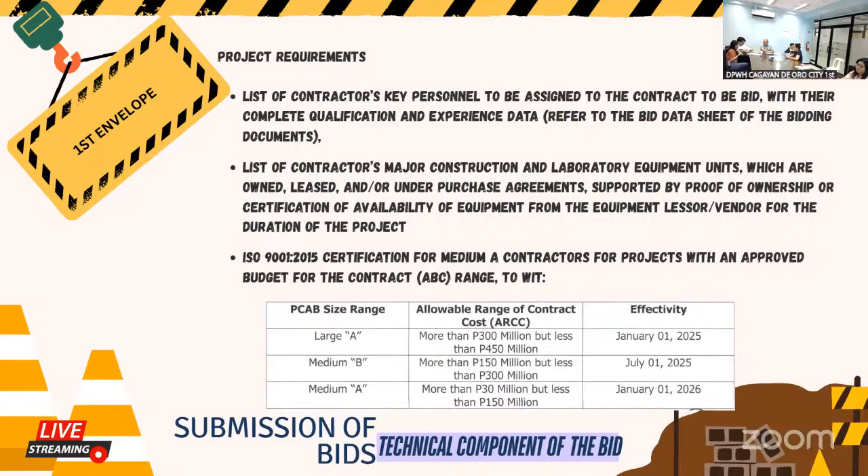So for projects with ABCs more than 30 million, it is required to enclose in their technical proposal the ISO 9001:2015 certification. This is for medium A contractors. So for the list of contractors' key personnel, we have this standard format. For the list of contractors' major equipment, this is the standard format also. We would like to remind prospective bidders to fill up all the required information in the forms.

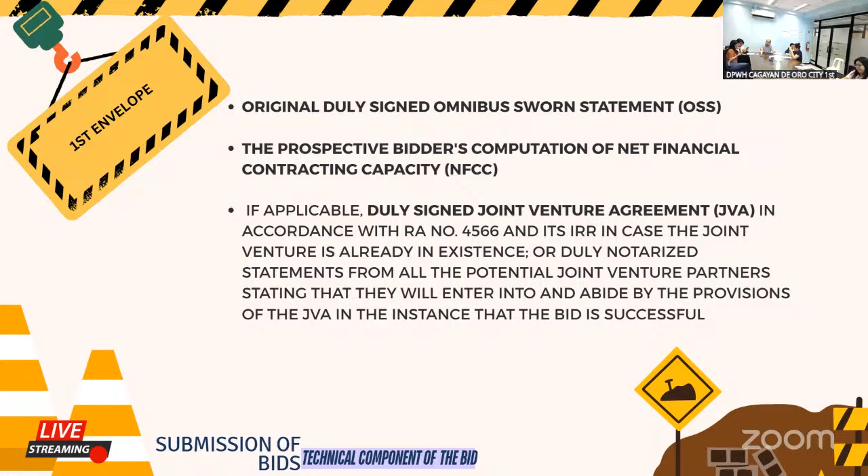So for our original duly signed omnibus sworn statement, the prospective bidder's computation of net financial contracting capacity. So if applicable, for joint ventures, they may submit the notarized statements from all potential joint venture partners, the joint venture agreement. So this is the standard format in accordance with RA 12009, the omnibus sworn statement. So the additional requirement we have here for corporations: kindly include the latest general information sheet reflecting beneficial ownership information duly received by the Securities and Exchange Commission for corporations.

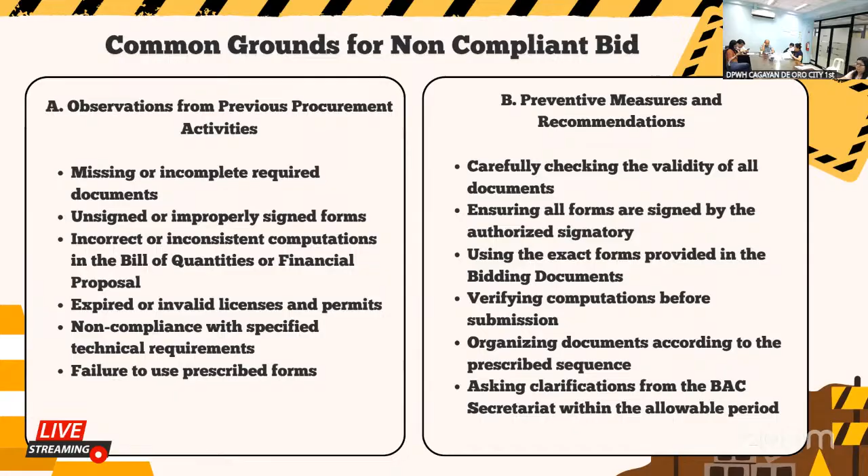So what are the preventive measures and recommendations? Prospective bidders should carefully check the validity of all the documents, ensure all forms are signed by the authorized signatory, use the exact forms provided in the bidding documents, verify computations before submission, organize documents according to the prescribed sequence, and ask clarifications from the Bids and Awards Committee Secretariat within the allowable period. So that would be all, Mr. Vice Chair. Thank you and good afternoon.

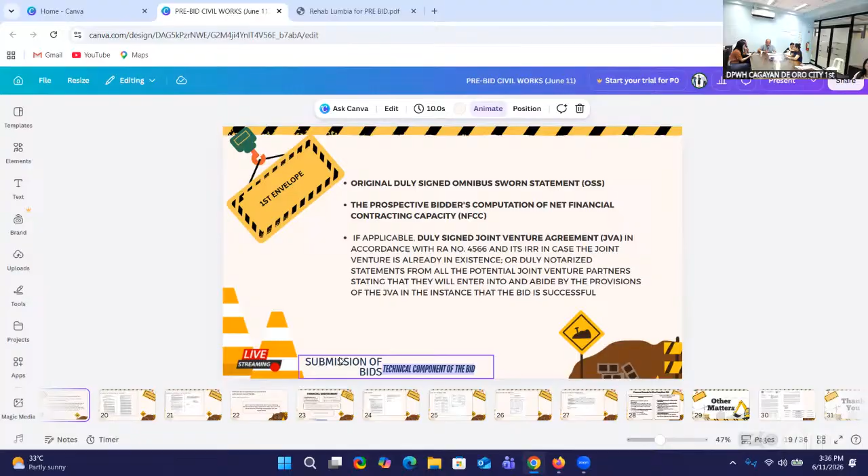Thank you, Engineer Ida. So again, I would like to remind our prospective bidders of their disclosure of their ongoing and awarded projects and verification, because the BAC will also have the verification of NFCC during post-qualification in DPWH. So the BAC will remind our prospective bidders during pre-bid of their obligation to fully and truthfully disclose all ongoing and awarded but not yet started contracts, including DPWH, other government and private contracts, by submitting the duly accomplished statement. So again, the Bids and Awards Committee reminds that failure to submit and declare any ongoing and awarded but not yet started contract constitutes a ground for disqualification and imposition of appropriate sanctions.

And then the strengthened NFCC verification during post-qualification. So the bidder's statement of ongoing and awarded contracts but not yet started, submitted latest audited financial statement and NFCC computation. And then during post-qualification, the official DPWH records reflected in the civil works application, project and contract management application, and other relevant department databases. So results of verification with other government agencies and private entities are diligently undertaken during the NFCC verification during post-qualification.